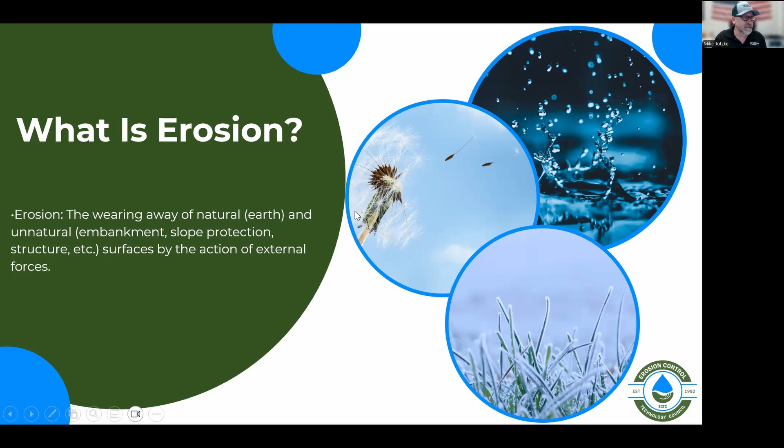So that process is simply the rainfall starts. That rainfall actually creates a lot of damage to that soil because it dislodges that soil if it's not protected and will cause those little particles to start moving.

Then you move into sheet flow as that water starts to accumulate and run over a surface area. And then that will create rills, those little small rills you see on many construction sites, which over time, if not taken care of, will create bigger gullies.

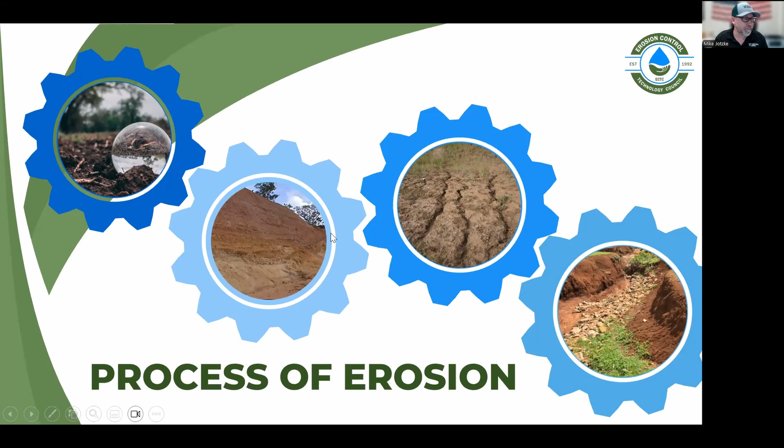But why do we really care about that? I mean, there's two main reasons. There's, of course, the economical impacts, but then there's really more important, the environmental impacts.

Economically, sediment leaves the site, you're losing nutrients and plantable area. So you're going to have to rebuild that, put nutrients back in. But of course, then that soil moves off site, so then you're going to have to deal with that. If it's in the waterway or anywhere, you're going to have to clean it up.

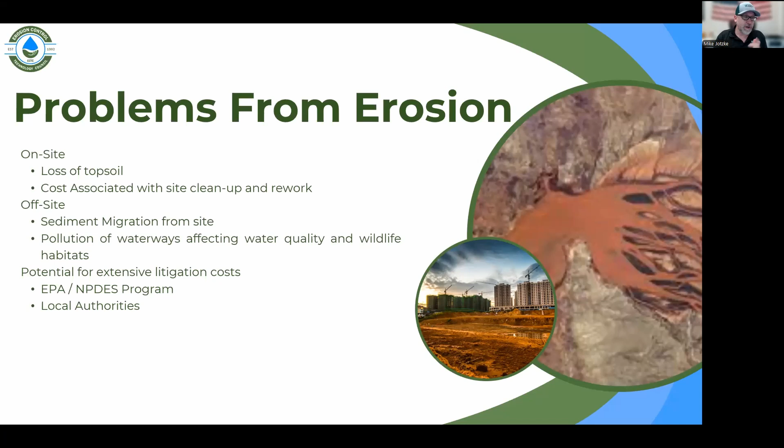So because of that, it creates a big financial impact. This is not just a U.S. problem, it's everywhere, but we spend lots and lots of money trying to clean it up—$13 billion annually just to take care of pollutants, not to mention all kinds of other issues.

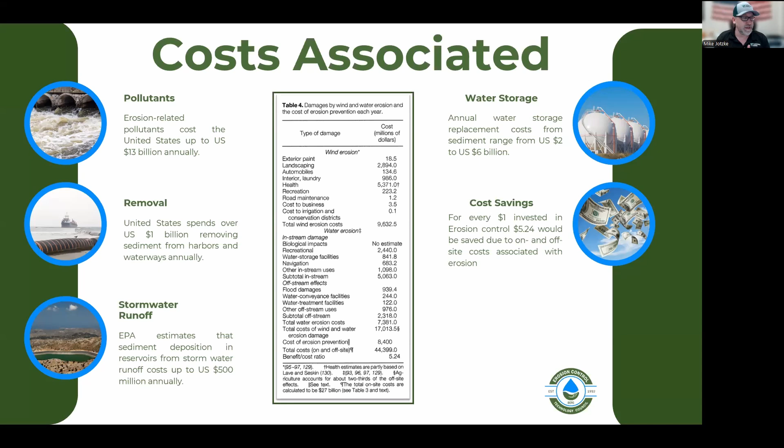But we did do a cost-benefit analysis on how well sediment erosion control devices work. And the study found that for every dollar spent on erosion or sediment control devices, we would see a cost savings of over $5 to the end user. So definitely worthwhile to invest in using these products.

We also do work with federal regulation. Of course, we get information from the EPA. We also share information with them to create best management practices and just make the best systems possible.

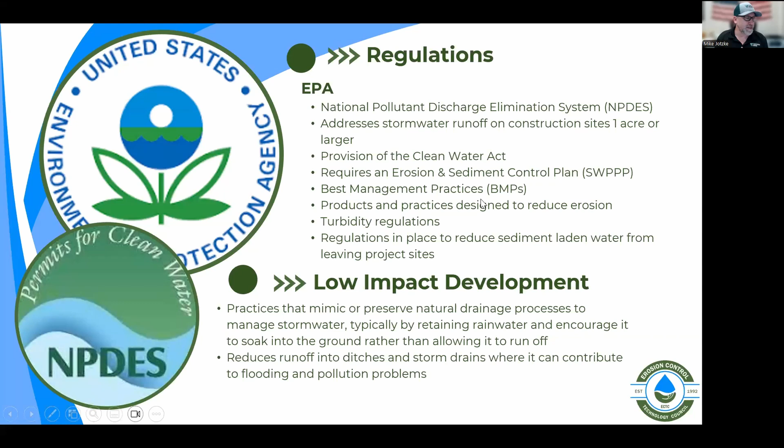So there's three different classifications for protecting against erosion control. You have your typical hard armor systems, which used to be used a lot—concrete, riprap, hard armor systems. Now these systems do work, but they're not necessarily always environmentally friendly. So what we mainly focus on is soft armoring systems or revegetation systems.

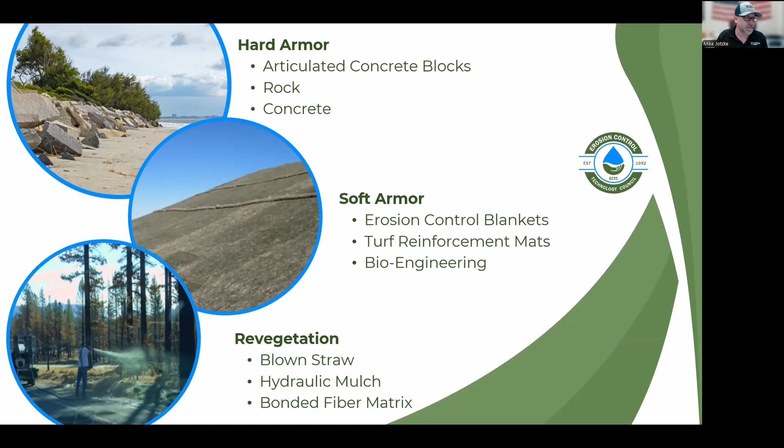The soft armoring systems are going to reinforce vegetation, help them to be stronger so that they can withstand that higher flow rate. And then, of course, revegetation—adding other things in there to help that vegetation grow, because vegetation can handle a lot of flow by itself. We'll get into the more specifics about these later in today's conversation.

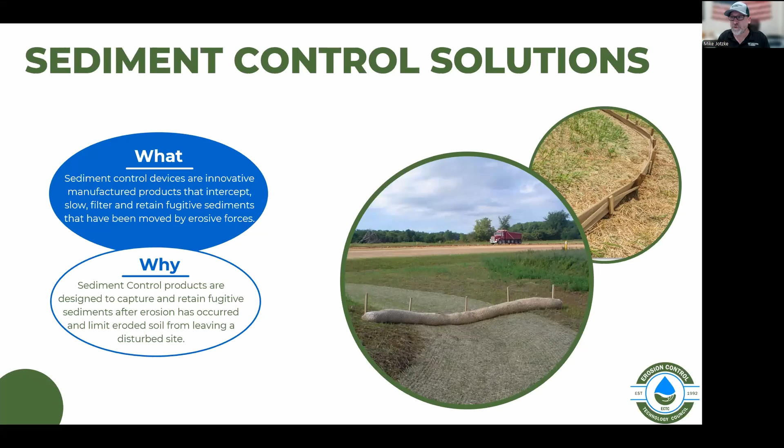We also have to talk about sediment devices. Erosion devices are going to stabilize that slope or channel and keep sediment from moving, but that's usually post-construction. During construction, you're actively working on that site and you can't put a blanket down or get vegetation to grow because you're working there. So you need to create a perimeter or a check dam or something to keep that sediment on site—that's where sediment control devices come in, which will be another section.

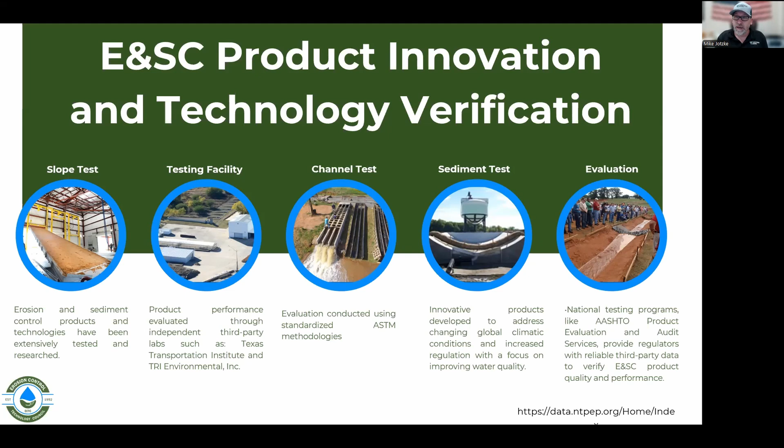Since we are a technology council, we rely heavily on testing labs, third-party testing labs. There's two that we mainly work with: TRI Environmental in South Carolina, and TTI, the Texas Transportation Institute. They're doing actual large-scale testing—running channels in a flume, doing rainfall simulation—to make sure we understand how these products work and how to design with them.

As I mentioned, we do have installation instructions on all these, and it is important because if you don't install them correctly, then a lot of times we will see failures. So definitely follow the guidelines provided either by the manufacturers or by us. You need to look at that and decide what's the proper product, what's the proper application rate, and how to install that. We do have, again, those videos on YouTube.

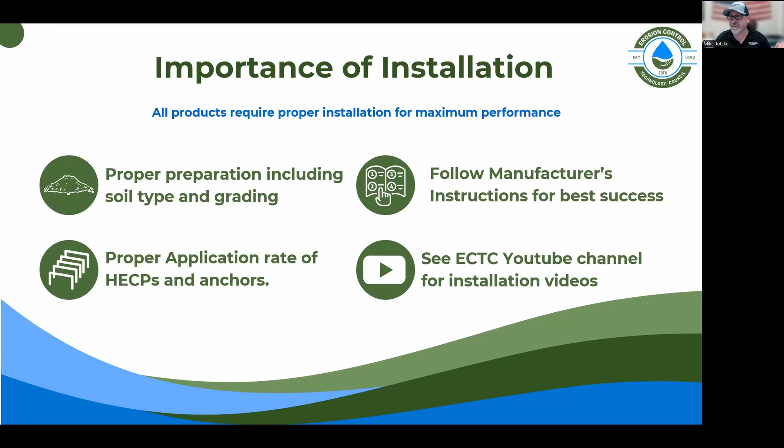And then one note about specifications. We do have all these specifications listed on our website, as you can see here. But there's two different categories of properties: index properties and performance properties.

Index properties are properties that describe the material—things like thickness or mass. These properties are really used as a quality control measure, telling you if that product is being consistently manufactured and if it's the product you ordered. But you can have two products with very different index properties that still perform the same way, so we really can't always define or compare products by index properties.

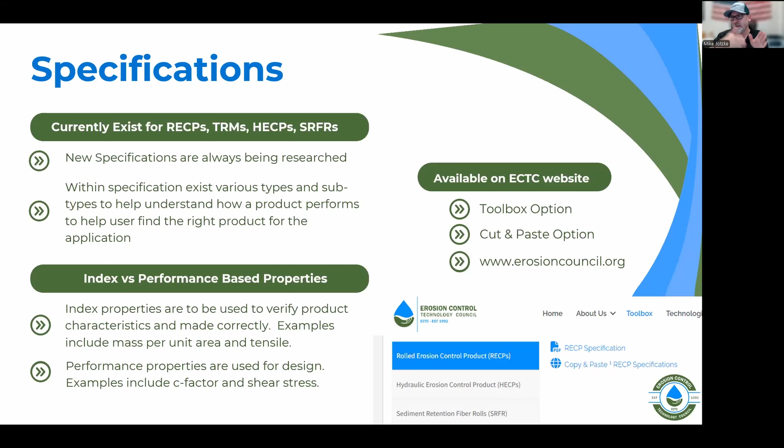But we can compare them by performance properties, and those are the ones you need to focus on when you're designing—things like velocity, shear stress, tensile strength sometimes—that you need to look at and decide if those are more important for designing a product and making sure it fits your parameters.

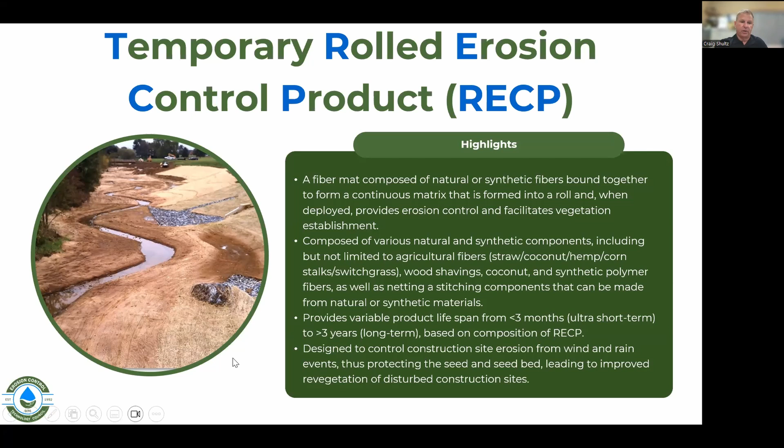So where can RECPs be used? Just about anywhere. I'm sure if you're on this call, you've probably seen them used in a lot of different places to control erosion and encourage vegetation.

As with any best management practices, we recommend that you look into all the things that are going to impact the performance, or the success, of your project. Soil type is a big deal. What do you need? What don't you need? What sort of extra protection or soil amendments should you be using to encourage vegetation?

What's the steepness of the slope or the channel? Very steep slopes may require different sorts of protection. You may have to establish your vegetation more quickly or put in a nurse crop or something like that. The type of flow scenario in a channel—under concentrated flows, some of these products are designed to work in more concentrated flows than others and to protect in certain conditions. Maybe we'll jump up to what we're going to talk about in the next section, which are turf reinforcement mats.

Let's talk about anchoring. This is an important part of any best management practice that uses anchors—the anchor frequency, the anchor type, how loose is the soil, how deep do we need to go, and those sorts of things. And the desired service life: temporary rolled erosion control products may last anywhere from 3 months to over 3 years, so what needs to be done to protect the vegetation and get it established?

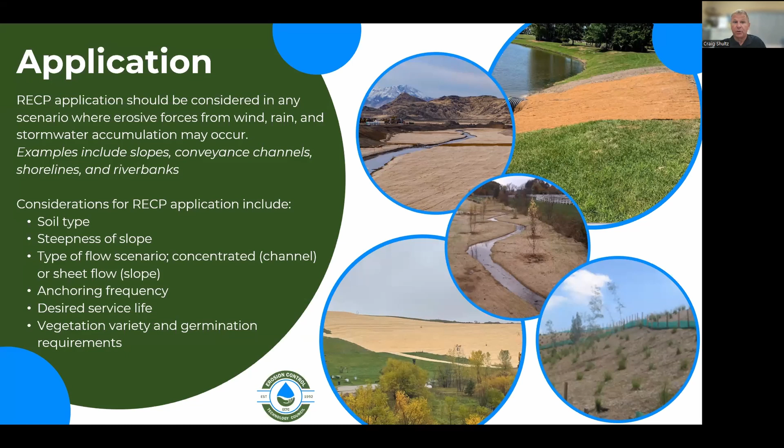And vegetation variety, as I mentioned earlier—what germination requirements are there? Do we have a nurse crop? Do we have an annual? Do we have a perennial? Do we have lots of natives? What are we working with? But these blankets can work in all these different situations.

So as far as the matrix types, the most common matrix types used in rolled erosion control products are broken down into these categories: straw, coconut, a blend of those two, Excelsior fibers which are wood, and a category for open weave textiles.

Straw fiber is an agricultural byproduct. There are lots of straw blankets on the market. It's pretty cost effective, and lots of different people make it. They're good at providing immediate cover and are typically used in less severe erosion control scenarios and on flatter slopes where expected vegetation establishment is relatively quick.

When you get into blends of straw and coconut, you take the benefits of both—again, natural fibers. In most cases you'll see those in a 70-30 blend, 70% straw, 30% coconut, able to extend your longevity a little bit with the coconut fiber, but still primarily straw.

Coconut is considered one of the longest lasting fibers used, with functional longevity of up to and maybe a little more than 3 years. These are fibers imported to the US, but they do have their application, and there are 100% coconut blankets as well.

Excelsior fibers are man-made machine fibers made from wood. They're cut to a certain width and length to get the fibers the manufacturer would like to have. Sometimes you may have heard of wood wool or wood excelsior—those are other terms used for excelsior fibers. They can create blankets with functional longevities from 3 to 6 months up to over 3 years, depending on the mass per unit area used.

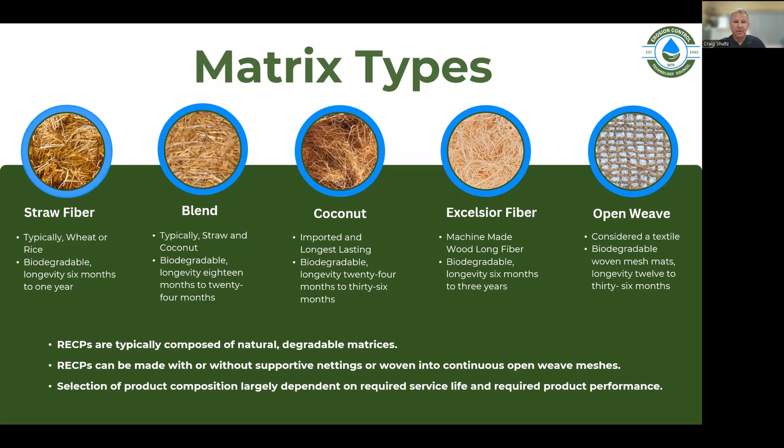And then lastly we have open weave, what we call open weave textiles, or OWTs. These are also natural products, woven mesh mats, with longevities of up to 3 years, and again lots of different configurations of those. We put one up there, but they're often considered a textile because of the way they're manufactured.

Netting. We've seen a big move in the industry toward some natural netting, but there are some netting types used. Most erosion control blankets do use netting, though there are some netless blankets on the market as well. The type of netting chosen can significantly impact the performance, the longevity, and the environmental footprint of the blanket.

There are four primary types. There's natural, biodegradable, typically a jute scrim, completely biodegradable, with 3 to 12 months of longevity. These nets generally have a woven design, so they're not fixed joints.

Then you also have a rapidly degradable synthetic netting, which is made of synthetic materials and is designed to degrade very quickly, usually within a few months. This type of netting is used primarily in temporary situations where vegetation is going to establish very quickly.

Then we have regular degradable synthetic netting. This also uses synthetic materials, but it's designed to last a little bit longer, typically 12 to 24 months. It's used in scenarios where a longer period of erosion control is needed before you're going to have full vegetation establishment, to give you that little extra protection.

And then lastly, the UV stabilized netting. This material is treated to resist degradation from sunlight, and this netting can last several years, providing that longer protection if you need it for situations where your vegetation is going to take longer to establish and more robust strength is needed.

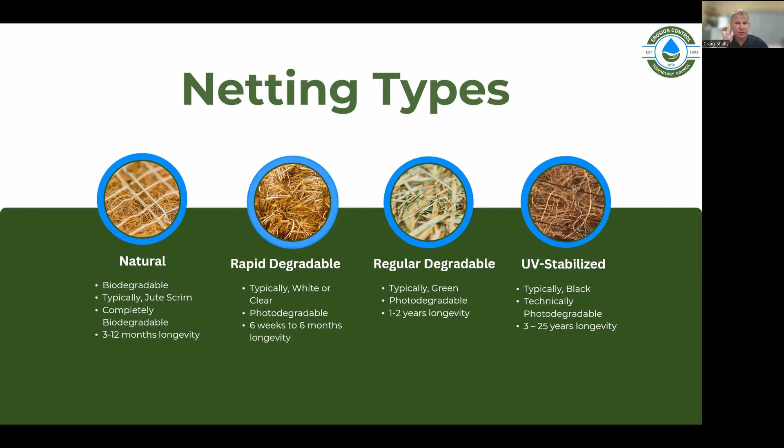Installation. Well, everybody will bring up installation, right? Everybody's going to talk about how important it is with any rolled erosion control product, and proper installation is huge when it comes to any sort of BMP, and blankets are no different. The specifics may vary depending on the type of blanket and the application, whether it's a channel or a slope.

But generally, you're going to talk about all the things that make sense, right? We're going to talk about site preparation—preparing the site, removing the rocks and the sticks, all those things to help ensure that the blanket has good soil contact, that the seeds have a good place to grow. We're going to pick the right vegetation, as I said.

Are you using a lot of natives? If so, are you going to put down a cover crop as your best management practice, to support and protect the environment long enough, and protect the seedbed long enough?

Roll alignment. When you're dealing with rolled erosion control products, especially in channels, you will always have an overlap of the seams to provide good protection under those flow conditions. With some products, you will also have an overlap on the slopes to make sure there are no openings. Some products on slopes don't require overlap, but every product that I'm aware of requires overlap in channels.

Securing the blanket—I mentioned that earlier. What type of anchors do we need? How loose is the soil? Do we need a straight type of anchor, a twist pin? What do we need, and how deep does it need to go? What are those conditions? And then putting them in the proper location and frequency, at channel changes.

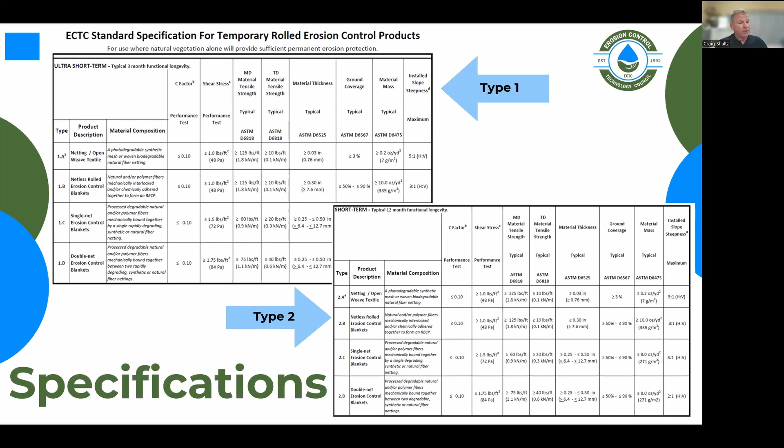The specification also provides guidance on appropriate applications, where you might want to consider using these temporary RECPs - things like slope, flow, shear stress, and those kinds of things - and help you find the correct installation procedures. We don't go into a lot of that today, but there is a lot of good information on the website for these specifications, and I encourage you to go take a look. All right, I'll pass it over. Thanks, everybody.

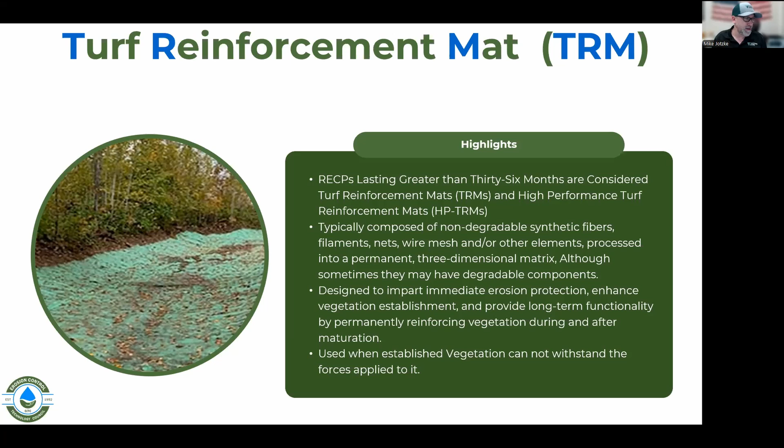So, turf reinforcement mat is just another type of RECP, although it's a long-term application. The technical definition: if it lasts longer than 36 months, it's considered a permanent turf reinforcement mat, or TRM. They're made of synthetic materials, but still do almost the same thing as an erosion control product does as far as protecting the slope. But it works with that vegetation, strengthening it so it can handle the higher flow rate it's experiencing. So applications where we see turf reinforcement mats are usually channels or steep slopes - can be other ones too, but typically that's where we're seeing them.

Things to consider: what type of soil are you working with, will you be able to get vegetation to grow, how much vegetation can you grow - those kinds of things we have to ask to decide which product is best to use. There are products that can be used for all of those situations, but we do need to ask those questions up front.

The top three pictures there are a channel that we were able to convert. Actually, the riprap had failed, and we had started getting too much erosion in that project. So they removed the rest of that riprap, regraded the site, and put down the turf reinforcement mat. This one actually had a degradable matrix in it, so it would help the vegetation establish a little quicker and have less synthetic material there. You can see it vegetated quickly, but with that mat it was able to withstand the shear force and velocity of the water coming out of that pipe to stabilize the site.

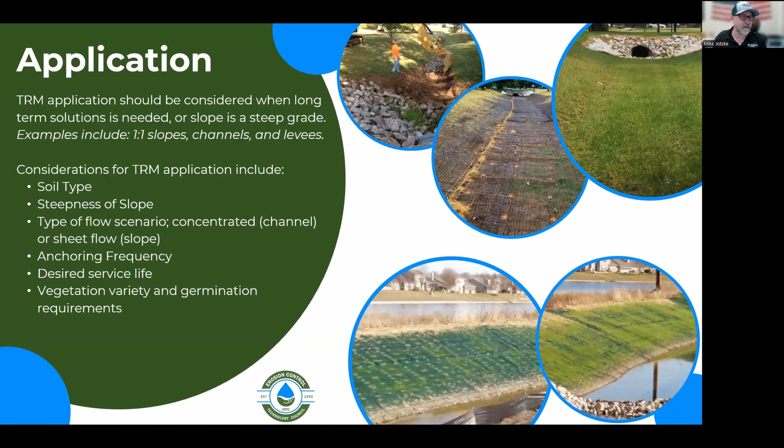Slopes too are important. As water runs off, especially on long, steeper slopes, that water gets really fast as it moves down. So you may be stable for the first half of it, but then it picks up so much speed that you lose soil at the end. That's where we're going to use a turf reinforcement mat as well.

There are three main types of turf reinforcement mats. We have stitch bonded mats, which have either two or three synthetic nets with a matrix inside of that net, all stitched together. That matrix can either be degradable or synthetic - so we could use coconut or straw inside for that natural component, which works in a lot of applications. But sometimes we know we're not going to get a full vegetation stand, such as in an arid environment, or in a condition where it's always wet and vegetation can't grow. That's when we use the synthetic material.

Melt bonded fiber mats use strands that are heated and melted together to create that connection, as opposed to stitching. These are usually a little more open in construction, so we blow a hydraulic mulch or other material into them to help vegetation grow. Again, it's to create an area where the vegetation can interact with the synthetic material and create a stronger system. Then we have woven TRMs.

Woven TRMs are considered high performance turf reinforcement mats. They have a tensile strength higher than 3,000 pounds per foot. So they act more like a grid in a lot of ways, but still protect against erosion. These are used in areas like spillways, levees, dams - really high flow, concentrated areas - and can also be used for structural applications and slope stabilization.

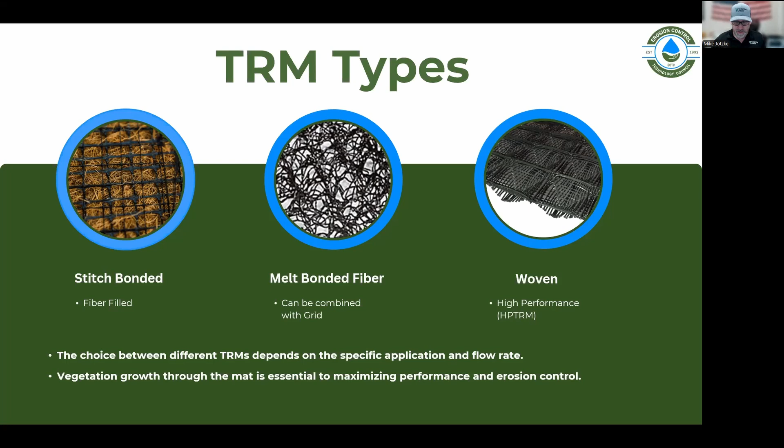Now, with all of these, vegetation is crucial. In the name turf reinforcement mat, it's made to reinforce that turf - either the root zone or the stem zone. So think about a site where you have a couple blades of grass; they're kind of individual, and the root structure holds them together somewhat, but water running over that can easily pull out those roots. If we introduce that turf reinforcement mat, those roots and strands of grass get intertwined in there and create a stronger system. That's how it works.

So we do usually want to use these with some type of vegetation. It can be used without, but your performance values are going to change a little bit. But we can get vegetation established almost any way. We can do it with seed underneath, seed on top, or we can put turf or sod on top of it and let it grow through. We can also soil fill these and let it grow through that way as well.

Really, it comes down to what is best for this site. What's going to create vegetation to grow the quickest? That's the method we're going to pick. There's not really one better than the other. On paper, it's what's best for your site.

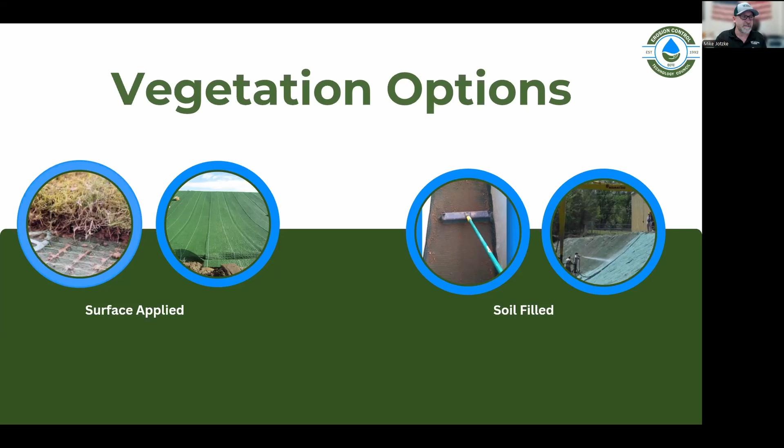And it is important, it doesn't have to just be turf grasses. It can be natives, which we do encourage, as it's going to create a better system in the long run with less maintenance. You can also do plugs through these. You can do trees, pots, almost any type of planting in conjunction with these to create the options that you want.

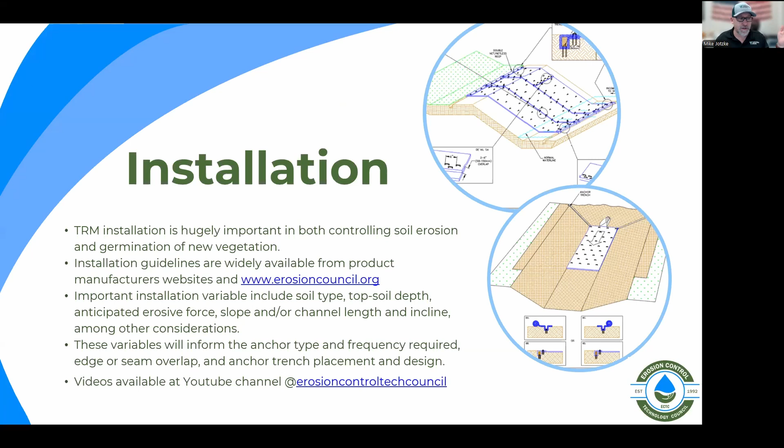Installation is going to be identical really, pretty much to RECPs, just making sure it's trenched in, you're not getting water underneath that system. And a quick note on specifications: there's basically 5 different categories for standard TRMs and then 1 for high performance turf reinforcement mats. But you can find all that information on our website.

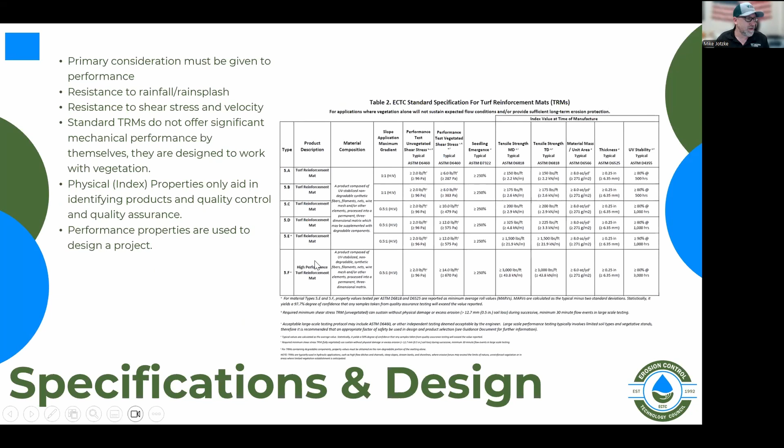So what happens once you hit that design performance level of a turf reinforcement mat? Before, you used to just have to go to a concrete hard system usually. But now in the marketplace, we have some transition mats. There's multiple different systems here that will help you get past that. So a turf reinforcement mat can get you to about 25 feet per second, maybe 30 depending on the application.

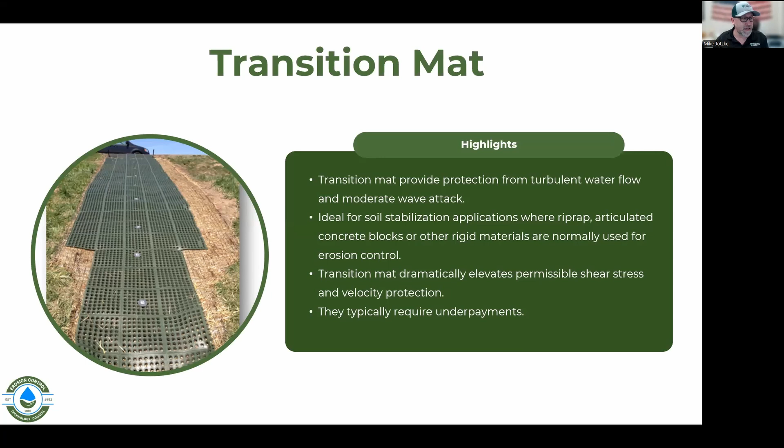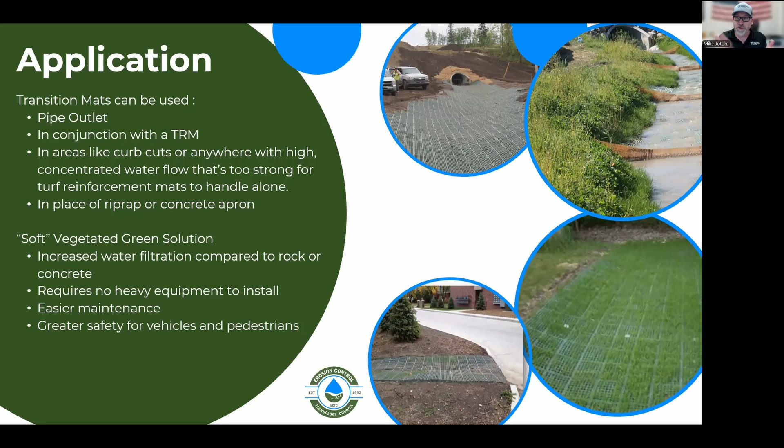And usually a lot less maintenance and long-term durability with this type of system as well. But you can use it anywhere, mostly used at pipe outlets, but then you can also use it at curb cuts. Really anywhere you have a really concentrated water flow, that's where these systems really come into play. Installation of these, you do need to still put a turf reinforcement mat underneath of that product, and then the transition mat on top of it. Still going to want to get vegetation to grow through it.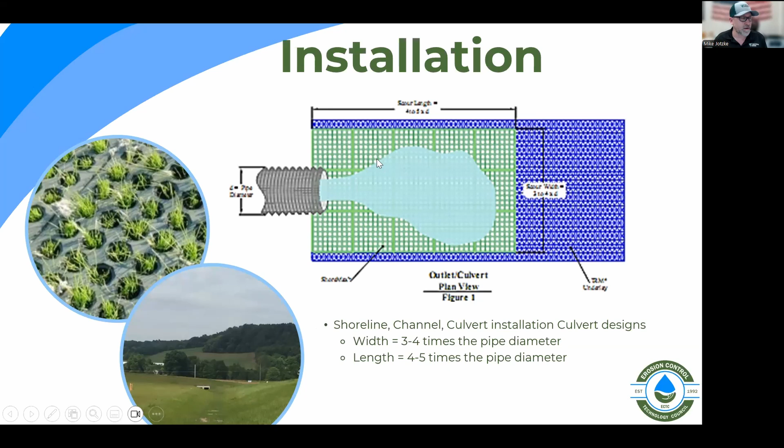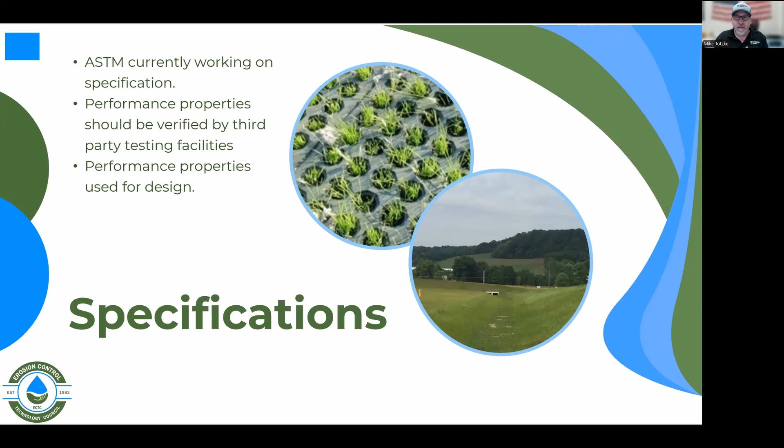General guidelines on sizing of that mat. Now that can vary, of course, but there are calculators out there available to help figure out what is best there. We currently don't have a specification. We're working on it in conjunction with ASTM right now to create one that's usable, but we can guide you through that process if you want. And then we move on to hydraulic mulches.

And that would be my part.

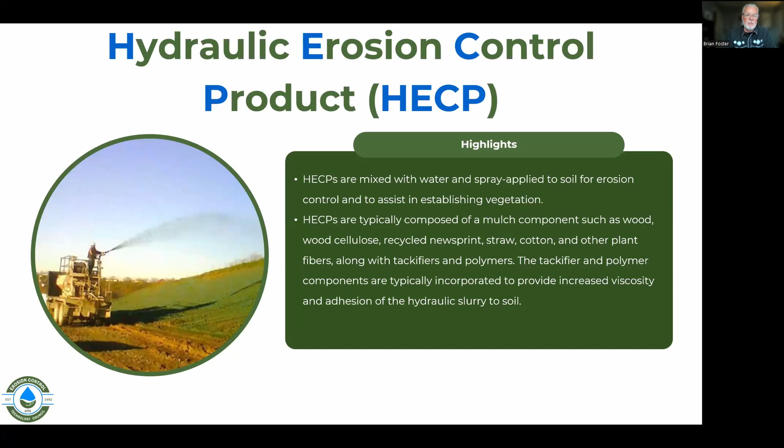Its acronym is HECP, one of many used in our field. HECPs are a mix of mulch that is mixed with water and sprayed onto soil. The primary purpose is to control erosion and establish vegetation. These products typically consist of mulch components like wood fiber, cellulose, recycled newsprint, straw, cotton, or other organic plant materials. A common feature in HECPs is the inclusion of tackifiers or polymers, which can enhance the adhesion of the slurry to the soil and bond to the fibers. When you hear the term bonded fiber matrix, it refers to this bonding process facilitated by the tackifiers. Sometimes tackifiers are included in the hydromulch bale, but they also can be mixed in the field and in the hydroseeder.

We're going to differentiate what hydromulching and hydroseeding is. The difference is that hydroseeding involves the inclusion of seed and soil amendments, while hydromulching does not. I'm in Southern California, and here, for example, our rainy season is very limited, and very often we use hydromulching solely for the purpose of soil stabilization without aiming for immediate vegetative growth. This approach prevents erosion until conditions are ready for construction or a more favorable planting season is upon us.

Hydroseeding, on the other hand, combines seed, mulch, water, and a slurry that promotes rapid vegetation growth. It's highly effective for erosion control and establishing vegetation rapidly over various landscapes. The slurry is applied using a specifically designed tank, called a hydroseeder. It's typically mounted on a truck or a trailer, and often includes the tackifier to help the mixture adhere to the slopes.

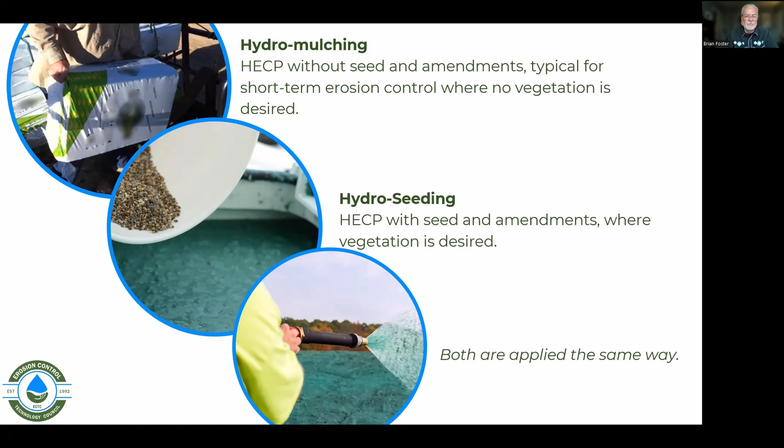So there's some advantages to HECPs or hydroseeding. Hydroseeding excels in covering large areas, hard to reach areas very quickly and uniformly, even on steep and rough terrain. This mulch, in a slurry, helps keep seed in place, retains moisture, and creates a beneficial microclimate for seed germination. Additionally, the slurry can be customized to suit site-specific conditions and desired vegetation types, such as grasses, legumes, wildflowers, or shrubs, depending on what your desired vegetation goals are.

Again, tackifiers play a crucial role in this erosion control practice by ensuring the mulch and seed adhere to the soil surface, reducing washout from rain and wind. While some slurries may include soil amendments or fertilizer to enhance growth, it's important to note that the hydromulch itself does not contain the seeds. The seeds are typically applied separately or mixed into the tank during the hydroseeding process.

The application machines are called hydroseeders, and they can vary in size, but typically range from 1,200 gallons to 4,000 gallons. Larger machines are quite powerful, allowing them to spray from significant distances, making them suitable for inaccessible and rugged areas. It's important to note that the green color in hydromulch is simply a dye used for visibility and does not affect the growth of the vegetation. This simply shows the applicator what areas have been covered and how much product has been laid down.

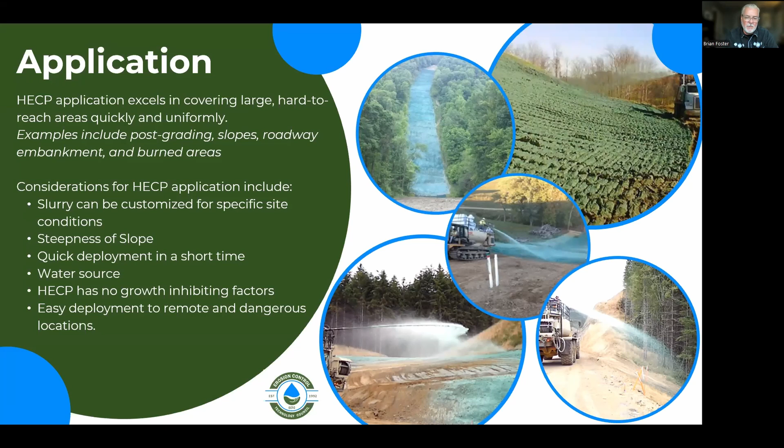And here in California, it gets used a lot on wildfire recovery areas. After a wildfire has burned, the soil is very susceptible to erosion, so oftentimes they will cover the ash and silt created by the wildfire with a hydromulch to keep all that silt and ash in place. Another large area where HECPs are used is for pipeline or other linear projects, so you can cover quite a big area in a short amount of time via hydroseeder. Both in pipeline and in burned areas, oftentimes we can incorporate the use of aircraft, be it a fixed wing airplane or a helicopter, to drop mulches out of the aircraft.

So in ECTC, we categorize HECPs into 5 types, ranging from what we call base mulches all the way to highly engineered performance mulches. On the far left, you'll have a base mulch—most typically 100% wood defiberized into a mulch bale and mixed with water.

Then we have type 2, typically a blend of either 70% wood, 30% paper, or some variation of that, but it might include a little bit of tackifier—at a 1 or 2% ratio of tackifier to mulch is kind of what we find in type 2. Type 3 increases the tackifier application or ratio, typically at a 3 or 4% ratio of tackifier to mulch, and that's what we call type 3.

Then you step into types 4 and 5, and that's when you get into the higher performing erosion control products. What we would probably call a bonded fiber matrix would be a type 4—these are prepackaged with a high level of tackifier included, some cross-linking agents, typically polymers, and various engineered performance products meant to be longer lasting and higher performing for steep slopes. Type 5 is where we really have high performance products that are engineered, typically all mixed into the bale—products that can last 12 months or longer on steep slopes, 1-to-1s, and are typically applied at 3,000 to 4,000 pounds per acre.

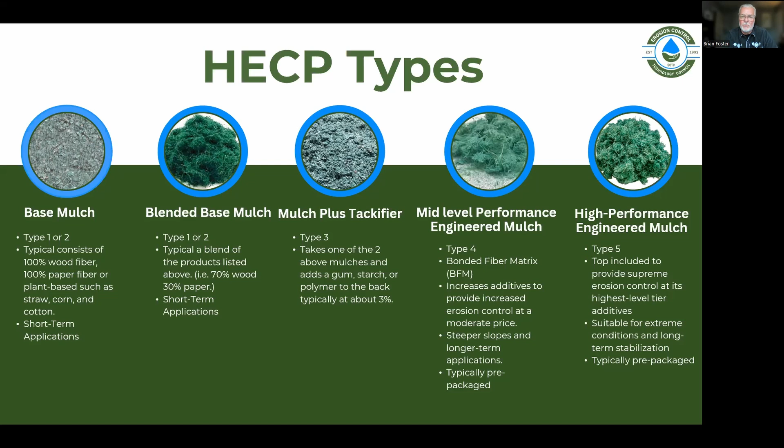So as in all BMP installations, slope and soil preparation is important. But unlike RECPs, where a smooth surface is recommended for blankets, because you want intimate blanket-to-soil contact, HECPs typically recommend a roughened surface. Track walking slopes, as you see in this picture, creates little cavities in the slope surface, and that's recommended for hydraulically applied products. It's found that track walking slopes, even if no other BMP is installed, can reduce erosion up to 42%. So remember, for a rolled erosion control product you want a smooth surface, and for an HECP you want a roughened surface.

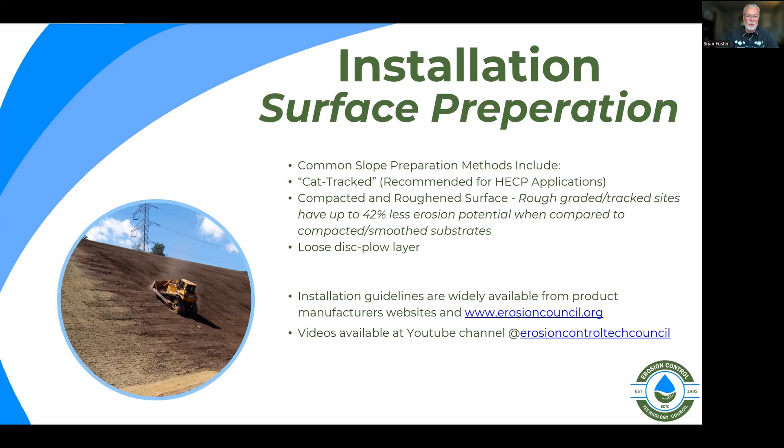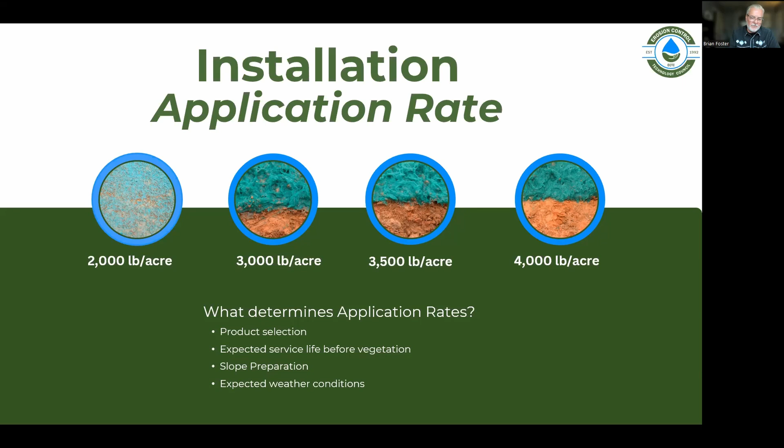Effectiveness of hydroseeding largely depends on selecting the appropriate HECP and seed mixture for each specific application. It's not one-size-fits-all; rather, it's about tailoring the selection to the unique requirements that each site presents.

Some of the factors that come into play are soil type and soil quality, climate and season, what kind of rainfall you're going to encounter in the next 3 to 6 months, project objectives of what you're trying to achieve, what kind of slope and drainage you have on your project. Regulatory requirements are going to mandate what kind of application you might use, and then also maintenance requirements — is it something you're going to walk away from and never come back to, where you might want to install at a higher level, or if it's near society, they may be able to come back and touch things up. So all of these are things to consider.

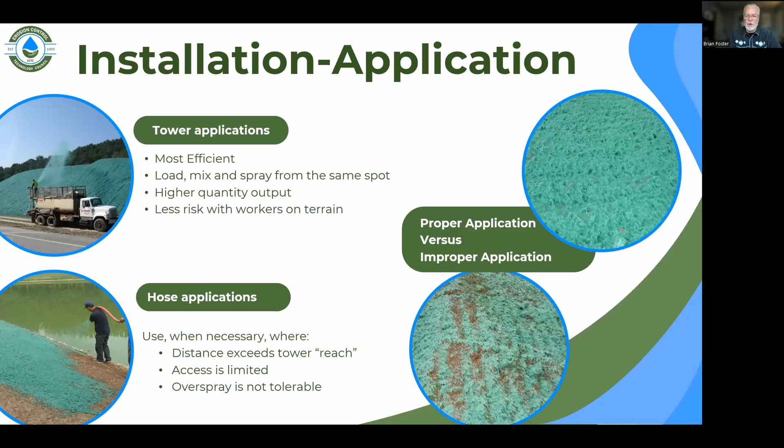Here on the right we'll talk about application rates again. On the top is a proper application; on the bottom you'll see what's called a shadowing effect. With hydromulches, when you only spray from one direction, because of the rough surface and slope, you'll see that shadowing effect. This was sprayed from left to right, covering the slope on the left-hand side, but the cavity on the bottom is kind of exposed, which can be susceptible to erosion. So it's often suggested to spray from both directions to get proper coverage.

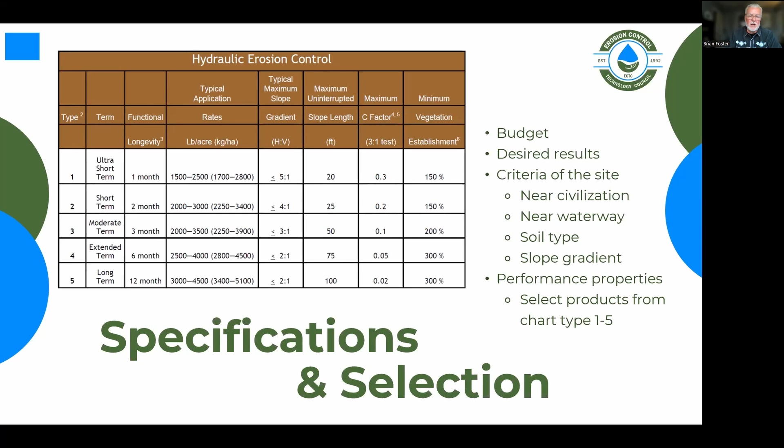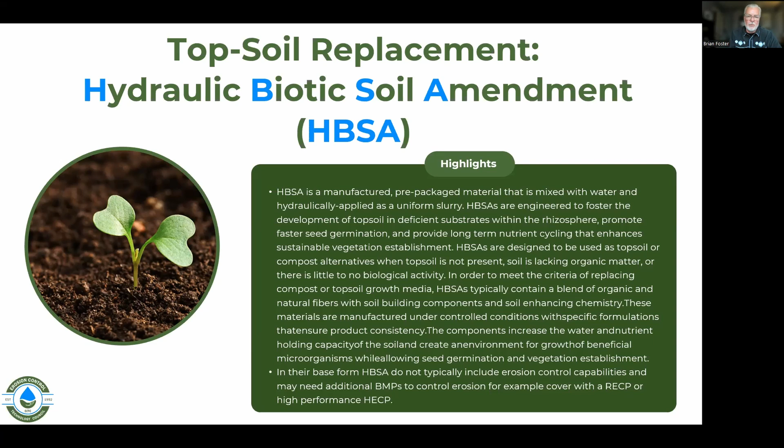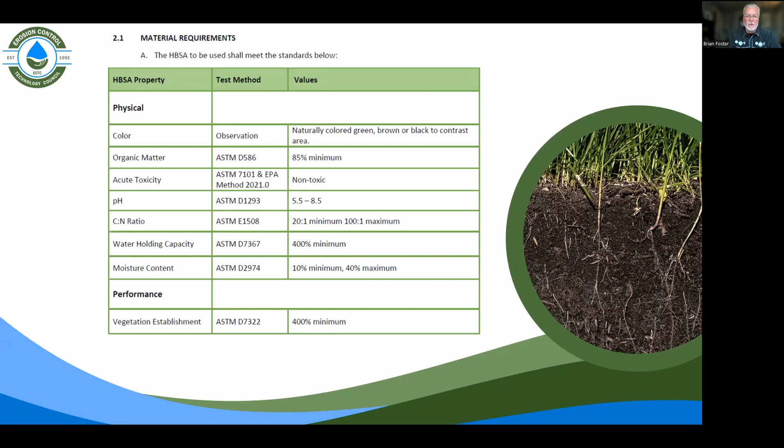One of the other categories we have for HECPs is replacing the typically wood component of a spray product with compost, peat moss, or biochar. These are called hydraulic biotic soil amendments, and they're typically called for when you have poor soil conditions, sandy areas with no nutrient value. These are nutrient-rich hydraulic mulches that give a great topsoil alternative that can get vegetation to grow, and as these products break down they feed the poor substrate soil to give nutrient value for long-term vegetative success.

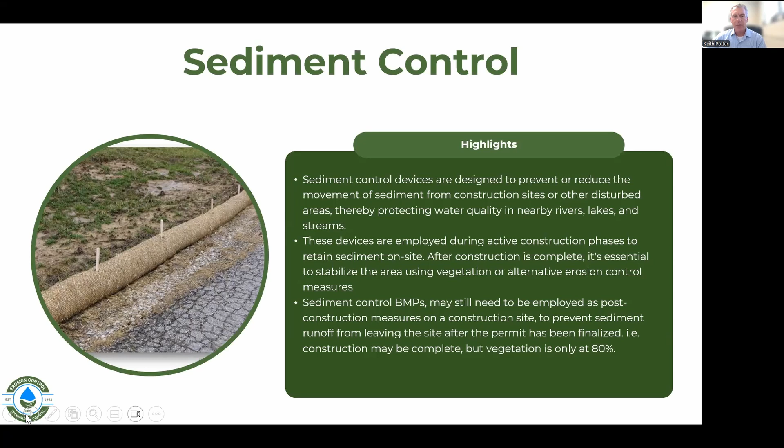I mentioned the different components - SRDs are usually some type of fiber matrix. That can be organic: straw, coconut, wood, or even synthetic materials such as polypropylene. Typically the matrix is enclosed in some kind of netting, which gives the SRD its structure. Again, that's where your project and method of erosion control come in, because site conditions and the desired lifespan of the project can dictate what you choose. For example, a biodegradable product might be fine if you're in an area where you can establish vegetation quickly, but if you're in an area where you won't be able to establish vegetation, you may need a more durable product.

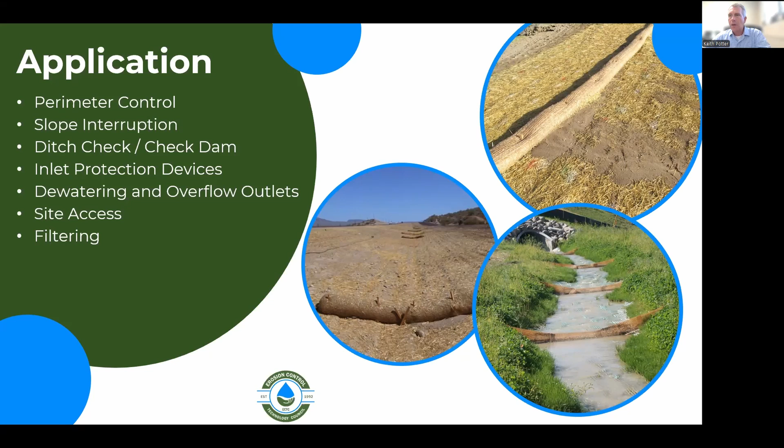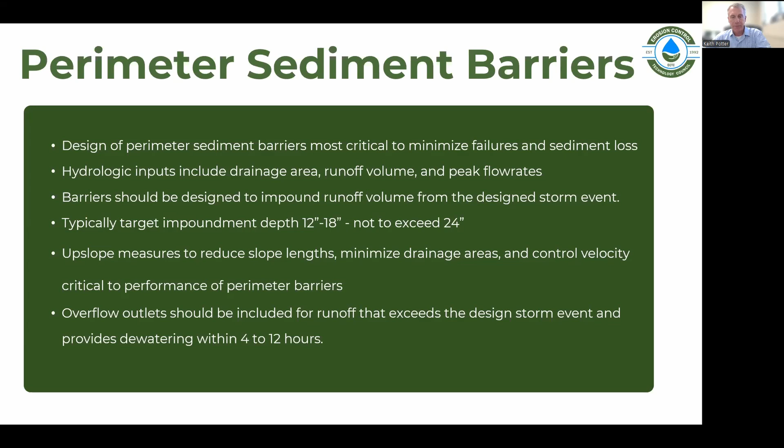For perimeter control, the biggest challenge I see is that oftentimes the volume of water you're going to generate once you remove vegetation from a site is underestimated. I'll refer you to the IECA design guide for guidance on designing sediment barriers. The main takeaway is, number one, you really need to design to only impound 12 to 18 inches of water - a lot of failures occur because more than 18 inches of water is impounded and it gets knocked down or undermined. The other is, because of that same concept, you need to think about how you're going to incorporate overflow outlets into your design.

As far as different products, there's everything from sediment retention fiber rolls, which typically use some kind of natural matrix, to high strength, multi-flow silt fences that are stronger and more durable. There are even biodegradable silt fence products out there now that, depending upon the erosion control method you choose, may be a really nice solution to your challenge.

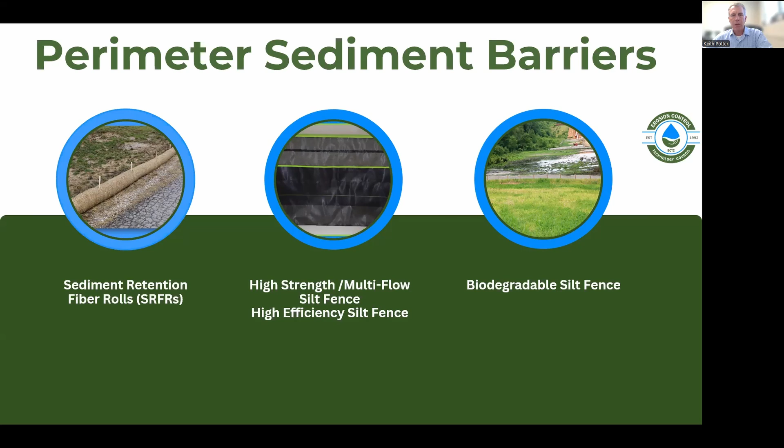Just a couple of reminders about the need for volume and velocity control.

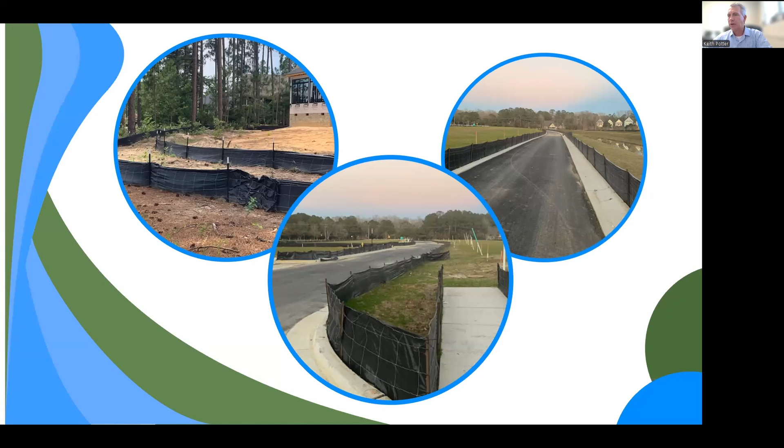So this is some examples of wire-backed silt fence. Again, proper installation requires that you leave some space in between those double rows of silt fence so you have impoundment volume. You also need to tie back into the slopes and use J hooks so that you're taking full advantage of that effective height and controlling the velocity better. Again, all addressed in the IECA design guide.

A couple things on slopes. The biggest issue here is, again, you're trying to increase your time of concentration so that all that water is not getting to your perimeter at the same time.

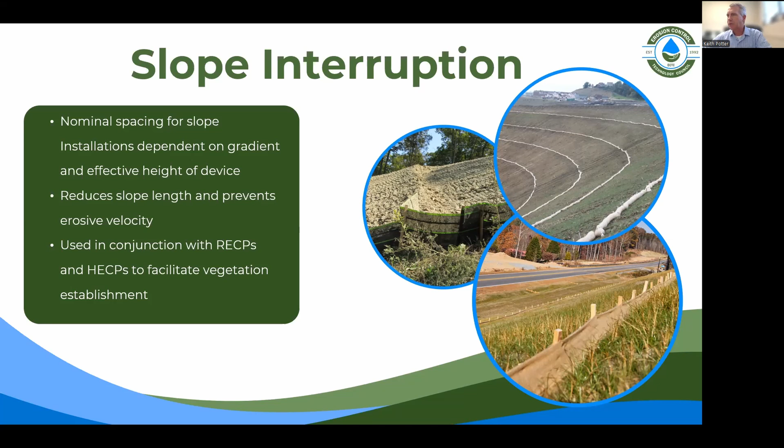And again, utilizing the erosion control method that you choose, you can see here on the top right, those are fiber rolls on a slope that's there to slow the water down so you don't have increased erosion going down to the perimeter. The one in the middle is showing a water bar and making sure that you've got some type of energy treatment at the end of your water bar on a right of way. And then finally, you can see the wattle fence on the bottom right on that nicely vegetated slope, giving you that velocity control so you can get that vegetation established.

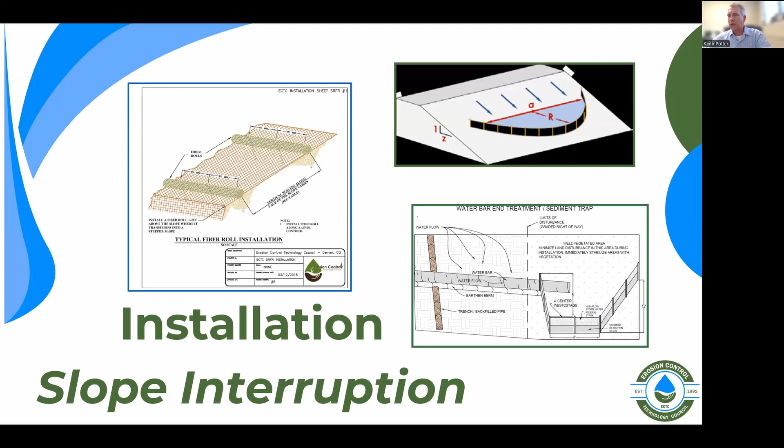As everybody's talked about, installation is critical, and there are installation guides in the IECA site, the ECTC site, as well as some guidance on IECA that you can see there.

Channels and ditch checks is another area that a lot of speakers have mentioned. Again, probably the most challenging place to get vegetation established is when you have concentrated flow going down a channel. And more, we hear that rock check dams are not always the ultimate solution. There's ways you can use sediment retention fiber rolls as well as geotextile products to give you that velocity control you need to get vegetation established that don't have nearly the installation and maintenance challenges of rock checks.

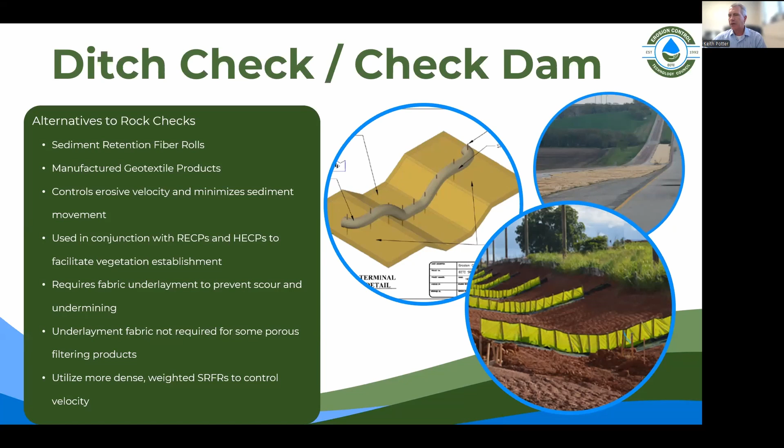Inlet protection is a little bit of a different beast. There's three categories that I see: above grade, below grade, and curb inlets. I won't go into any detail on any of these. The main thing I wanted to leave you with is you really need to think about where that runoff is going to go, because these are catch basins, you're going to get concentrated flow. That's how the site is graded. And so you need to really think about, if you're putting up something that's very rigid and has no flow rate, where are you going to divert that water to, and how are you going to manage that diverted water?

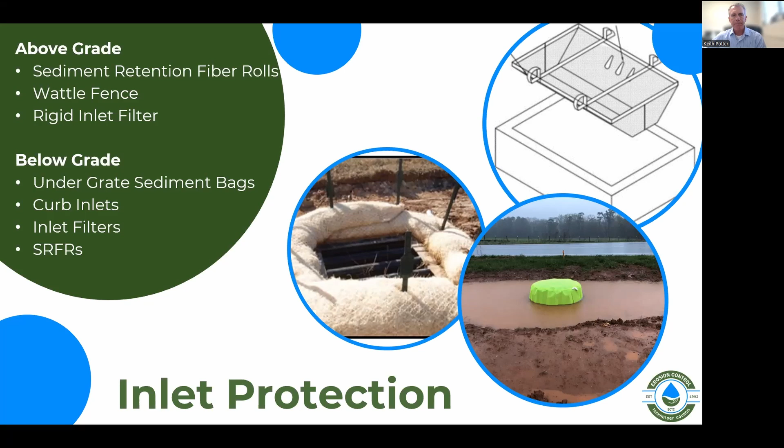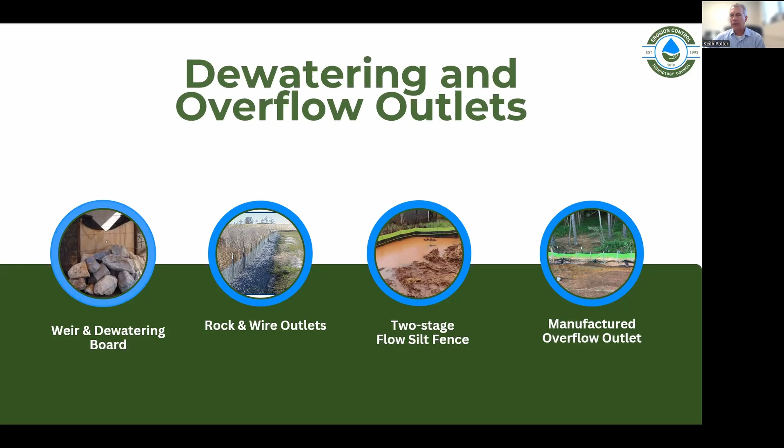The next slide is talking about dewatering and overflow outlets. Again, this is an old concept that has gotten some attention recently, especially in the IECA design guide, but it really points out the need to look at different options. There's four options demonstrated here: the dewatering board, rock and wire, two-stage silt fence, and a manufactured overflow outlet, that will all allow you to handle larger volumes and peak flows, especially on big drainage areas where you're ultimately going to be dependent upon basins, but it takes time to get those basins in and get them stabilized.

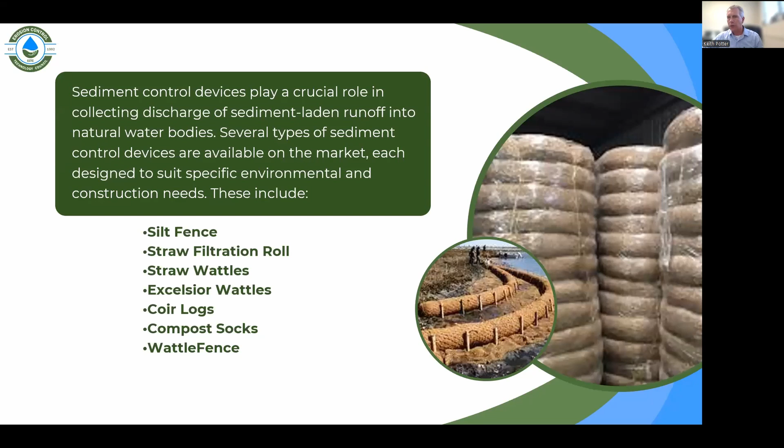In wrapping up, sediment control devices again come in many different forms and fashions, made out of a lot of different materials. There's straw, there's Excelsior, there's coir, compost, biodegradable things like the wattle fence. Again, just encourage you to think about how you're going to match these up with your specific project and with your specific erosion control solution.

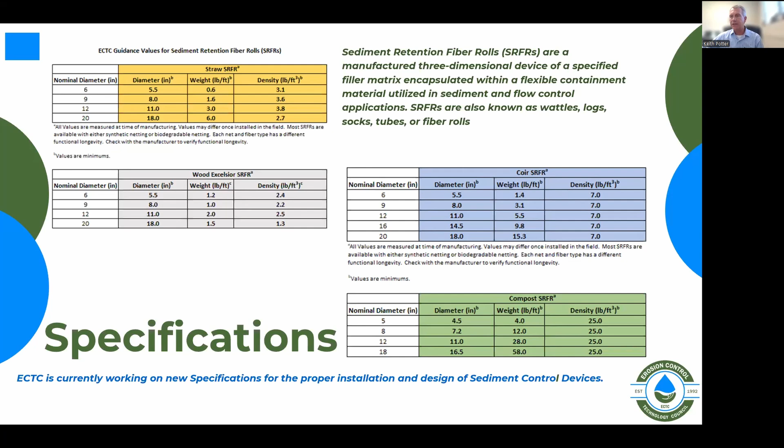Specifications, there are specifications in ECTC for sediment retention fiber rolls, and we continue to work on specifications for other types of products. We've mentioned our relationship with both the Texas Transportation Institute and TRI in helping with those tests and helping with those specification developments.

And finally, I wanted to mention polymers and flocculants. Most of the products we've talked about are dealing with trapping sediment, total suspended solids. Turbidity is a little bit of a different animal, but equally as important. Using a polyacrylamide or some type of chemical to bind to those particles and remove the turbidity from the water is another area you need to think about when designing your sediment control projects.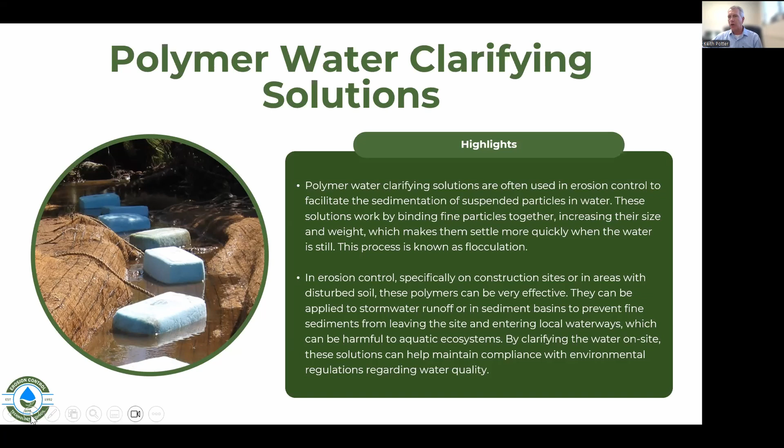So with that, I will turn it back over to Mike, and appreciate everybody attending.

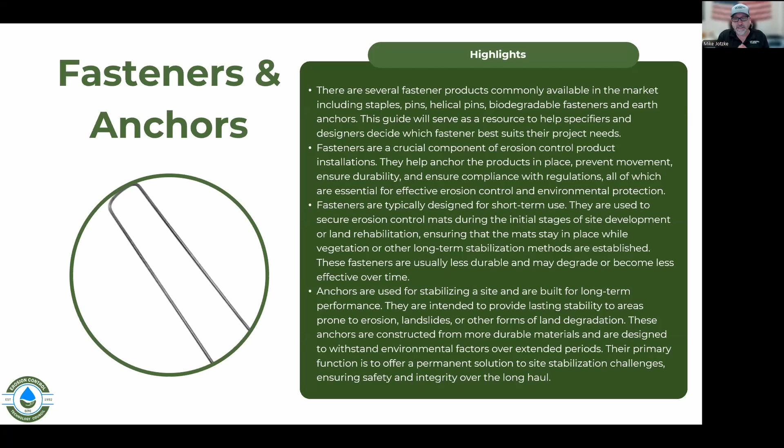So with all of these products that we've talked about, anchoring is definitely something that has to be done with just about every single one. There are a few that may be self-weighted that don't need anchoring, but almost everyone does. We've divided anchors into two separate things.

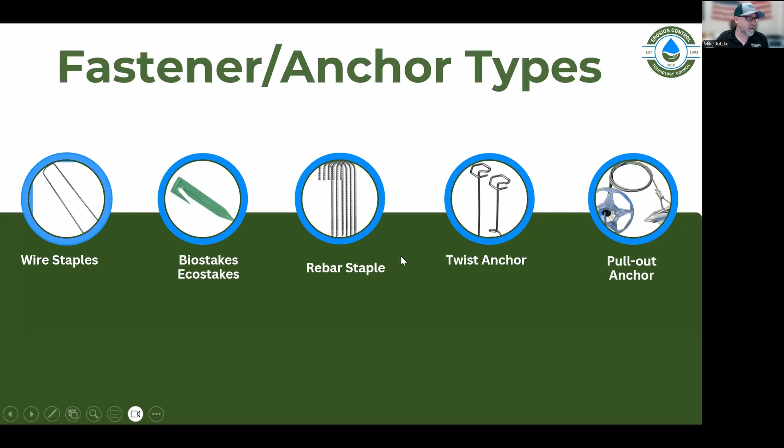For sake of definition, we have fasteners, which are temporary products, and anchors, which are permanent or longer lasting. So your sod staples, biodegradable staples, and wood stakes are all fasteners or temporary. Then you have bigger anchors like twist pins or earth anchors, which are permanent because they're galvanized and made to last longer than just a year or two.

They're used everywhere. If you're using a biodegradable blanket or product, you're probably going to want to use a biodegradable stake as well. There's wood stakes and also biodegradable plastic stakes, made out of cornstarch or potato starches that will slowly degrade over time. There are biodegradable options for your staking.

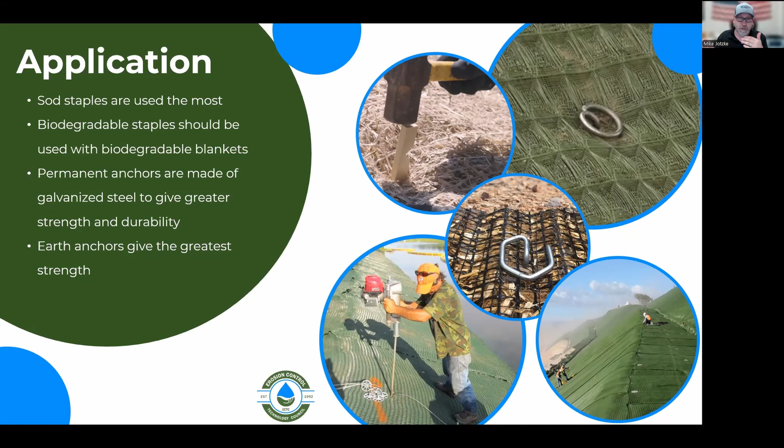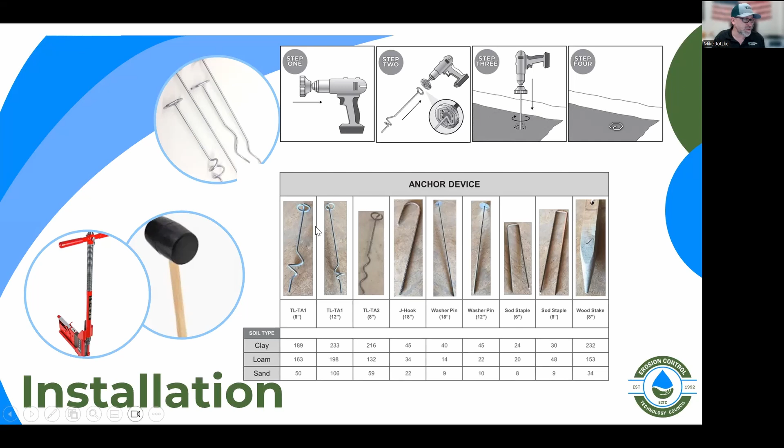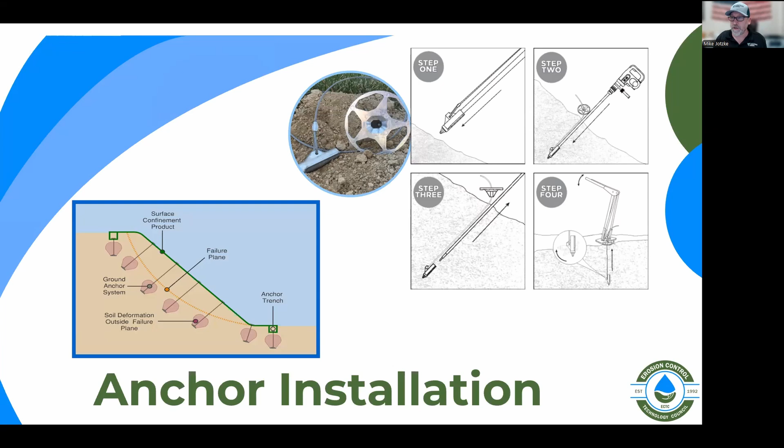That's when you'd use a helical pin, which is like a drill—it drills right into the ground and you get better pullout strength. There are different ones for different soils. Earth percussion anchors are also an option, used for soil stabilization, giving pullout strengths up to 5,000 pounds. Definitely specific applications for those.

We do have a detailed guide for how each of these should be used on the website. So if you have more questions, go there or contact one of us. And here is our information.